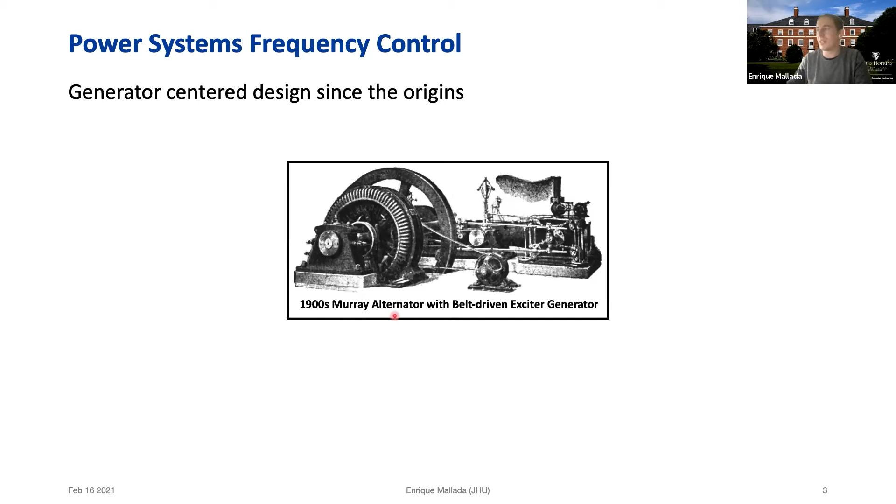And I will argue that this is a problem that dated from the beginnings of power systems. In fact, the whole control architecture around this frequency was built around synchronous generators, like this one I'm showing in this picture that is quite old, from the 1900s. And a key part of this control architecture is something that we call Droop control, which is in charge of many things. Essentially, it's in charge of making sure that supply and demand is balanced. It makes sure that all generators basically are synchronized with the same frequency, and also it's in charge of actually distributing changes in the demand across different generators - that's what we call power sharing.

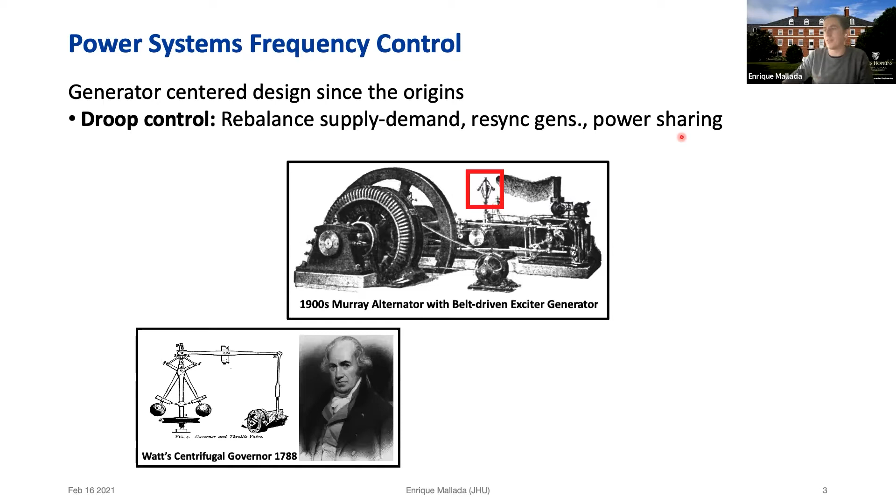But I would argue that this is perhaps something that was not initially invented for power systems. In fact, every engine that you can think of, even steam turbines before that, actually had a very similar mechanism of control. And the mechanism is fairly simple.

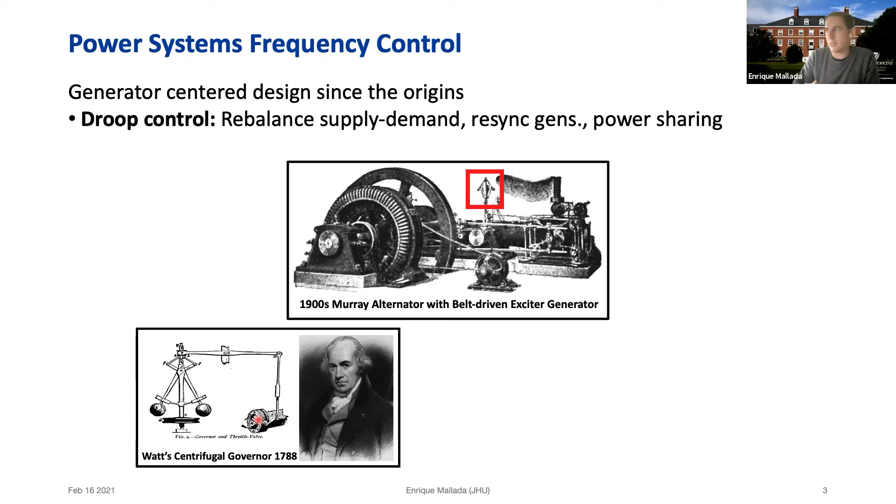So this is a rotating vase, and the balls, as you start to speed up, they go up. So this lever basically goes down, this guy goes down, this guy goes up, and then you close the valve. So in a sense, whenever you see that your generator is starting to speed up, it's because it's basically emitting more energy than the one that is demanded. Then you close the valve and you slow down.

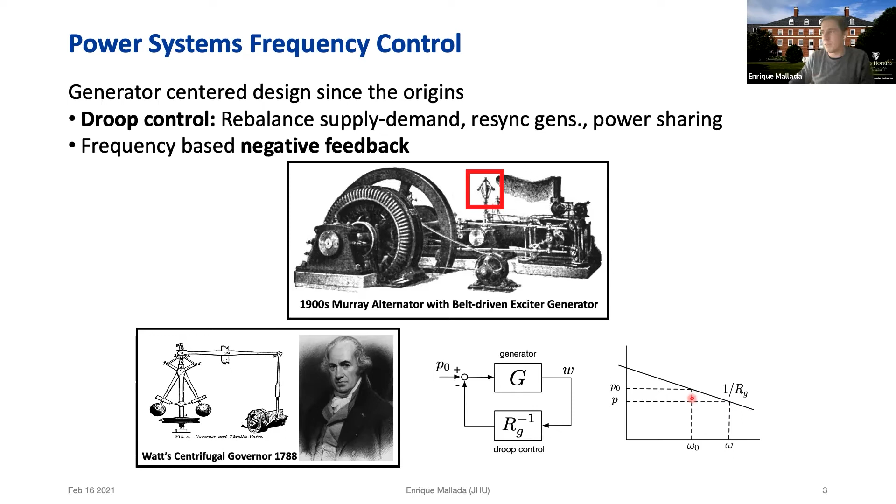And for the control audience, this is nothing more than a standard negative feedback. You have a generator, you measure the speed, and then you make changes proportional to the change of the speed. And therefore, that's why you have the negative slope, meaning speeding up implies reduction of power. Okay, so far so good, and it's very simple. And if you are not fully convinced about the mechanism, I'd like to provide you with a mechanical analog.

Think of a generator as one of these trucks, and the goal is you're going uphill, and you have to push a certain load. There is some friction, some demand, some payload that you need to carry, and then you go with a certain speed, you have your mass, and you're exerting a certain amount of force that pushes you uphill.

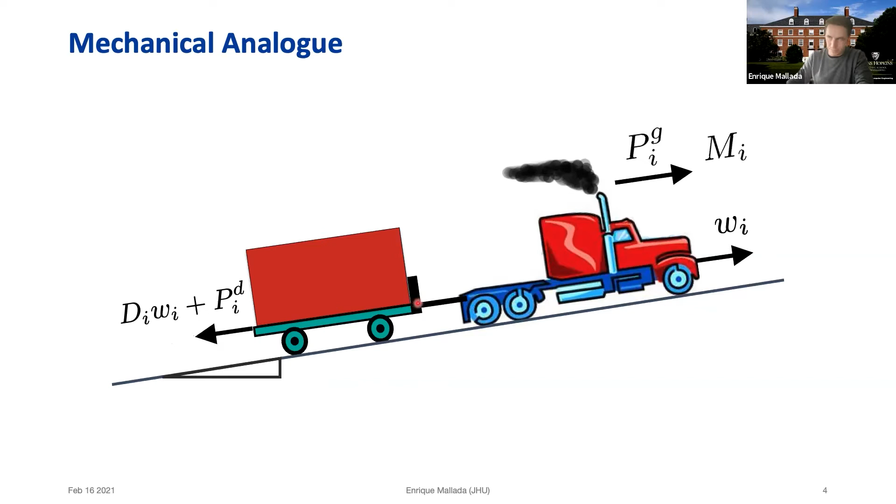What happens in power systems is that this load changes over time, so the drag changes over time. You want to, despite all this, maintain the speed constant or closely regulated around a nominal 60 Hertz, or 50 Hertz if you're in Europe. Although this is not true for trucks, the closely regulated part is more critical in power systems, because if you go too far away from this, you start to excite certain resonating modes in these machines, which is something you don't want to do.

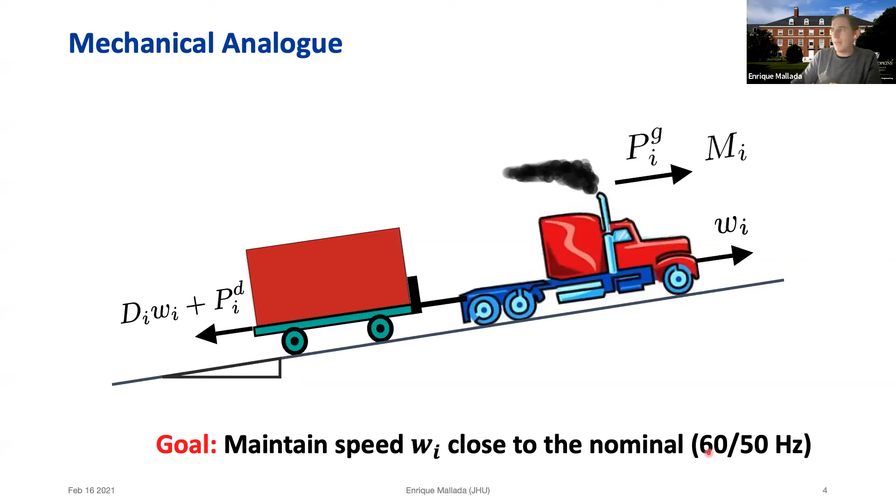It looks not so complicated, except that what you really have is a full network of a lot of these generators all interconnected with each other and dragging loads that are distributed geographically around the whole, for instance the Eastern Interconnection, so the east of the US, or the West. So it looks like this. The way you really solve this problem of making sure all these trucks are running at the same speed is by a hierarchical structure.

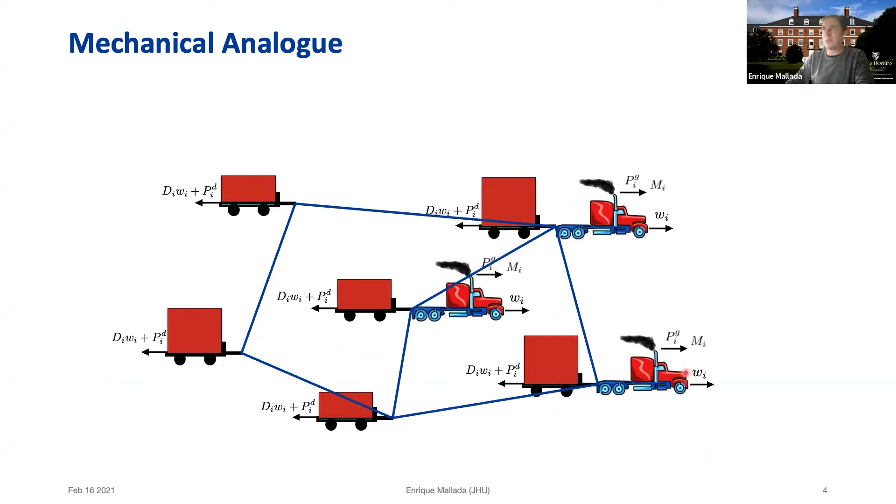There's a first stage that is called primary frequency control, that is this droop control, this proportional feedback. Then you have an additional layer of more sophisticated control that ensures other things, like making sure the nominal frequency stays around 60 Hertz, and also that the power going through tie lines of certain interconnections with other areas is maintained. So this is like a snapshot of what frequency control in power systems looks like.

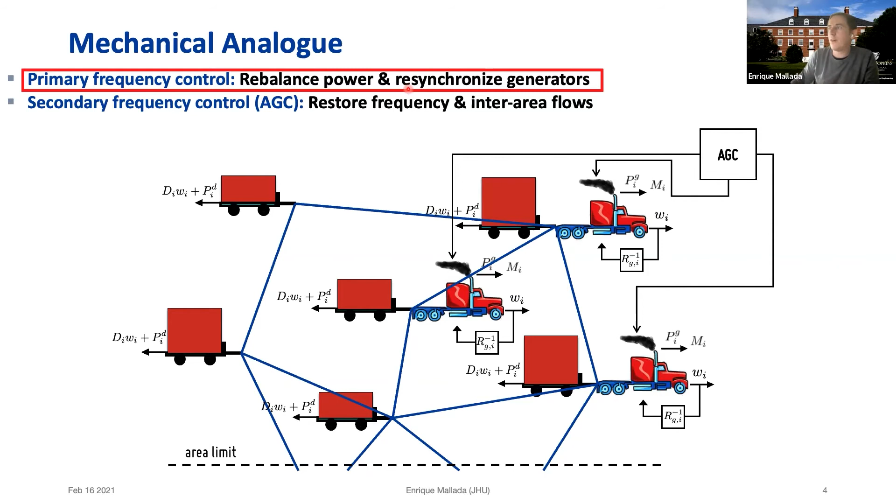From now on I really want to talk about the first part, actually rebalancing power and resynchronizing generators, because as I mentioned before, this is a talk about low inertia and the fact that there exists some dynamic degradation happening in the system that is caused, indirectly, by the integration of renewables. And this is not a hype, it really happens.

If you look at the Nordic system in Europe, you see frequency fluctuations deviating more and more from 50 Hertz. Ireland has a limit on how much renewable generation they allow as a fraction of the total load. It used to be 50%, I believe nowadays it's more around 75%. But the point is, after a certain threshold, there are concerns that the system might not recover from certain events, so they have to actually curtail renewable generation.

Even in the US, while the problem is not so drastic today, there's already some evidence of this dynamic degradation, so frequency fluctuations are becoming larger and larger. I mentioned that this is related to inertia, and to drive this further, I'm going to show an analogy that shows why this happens, why these behaviors indeed occur.

So let me give you an illustration of what I'm talking about. This is a very simple pendulum, heavy, a big pendulum. So for me, this is big. What I'm going to do is kick it, and see what is the response of this system for this particular pendulum.

I'm going to show you the angle, the velocity, and the forces, including the friction and the disturbance that I apply. So there goes the disturbance. And then you can see that you have friction going on here, so there's an energy dissipation. And you also see these angle fluctuations and velocity fluctuations going.

One thing that is interesting about this particular case is that even though the disturbance actually is prolonged over time, the actual amplitude is not so critical, not so big, since it's a big pendulum. So when you push it, it takes a lot of energy to put it in motion beyond the steady state. So in a sense, the fact that the oscillations are bounded, not so large, tells you that it provides this natural disturbance rejection when you have a high inertia pendulum. But also it's hard to regain steady state, so it takes oscillations and settles longer and longer.

Okay, let's now try to see a low inertia pendulum. This is how a low inertia pendulum looks like, and I'm going to do the same force. And now you start to see two differences. The first one is very large oscillations, the amplitude of these oscillations are larger. So you can imagine why we're seeing larger oscillations also in the power system when you have less inertia.

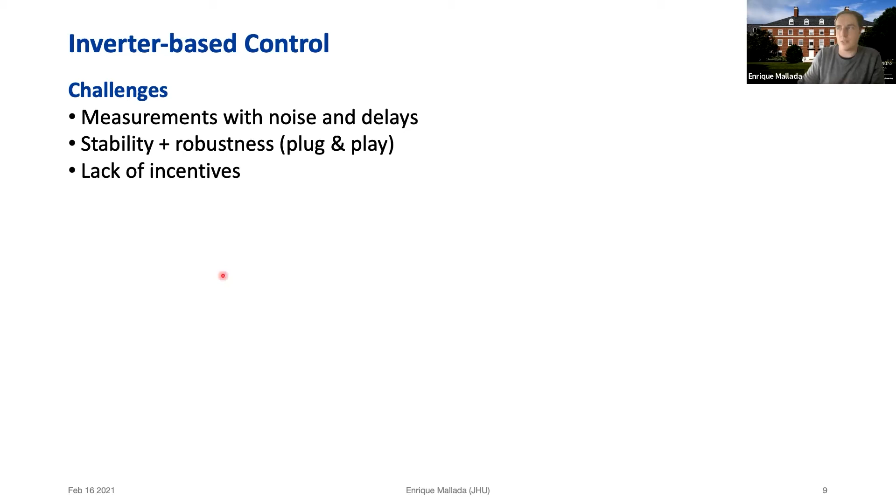So that's it. But how are we proposing to solve this problem? Many people are proposing to solve this problem by saying, okay, from the dynamical point of view, something that's plug and play—one solution would be to basically make these inverters mimic the response of a generator.

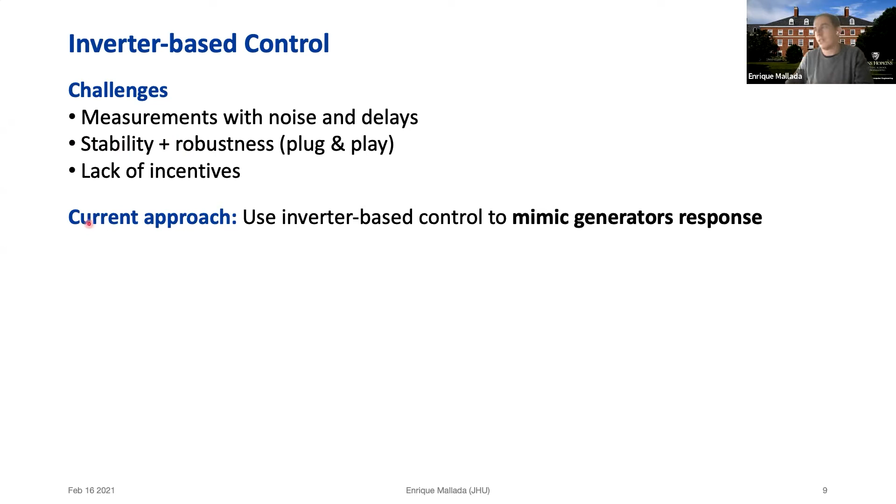So if you want to put it in a picture, it will be something like this. You have very sophisticated power electronics that are extremely fast, and you design a controller that makes it behave like one of these generators.

And you get the argument. So it is one way to do it, but I always have this analogy that to me this is sort of like saying, so I have your favorite smartphone and you make it work like an old phone. It's like, sure, this probably is gonna work, but there are certain trade-offs and certain things of making this type of decision that actually might prevent you from doing something that is much better.

And this is sort of like what we're trying to propose, is trying to say, okay, let's try to think of this as a control design problem and try to design controllers that actually achieve the performance metrics that we care about in the power system.

So what are our design objectives? Basically exploit the capabilities of power electronics, improve dynamic performance, of course. I would say control effort, in the sense of the amount of power that I need to deviate from my nominal production, is important. And then of course the stability and robustness. Because I don't have the whole day to talk about this, while we have been working in all these areas, I mainly I'm gonna talk about improving dynamic performance and this issue with the control effort that is gonna become more clear soon.

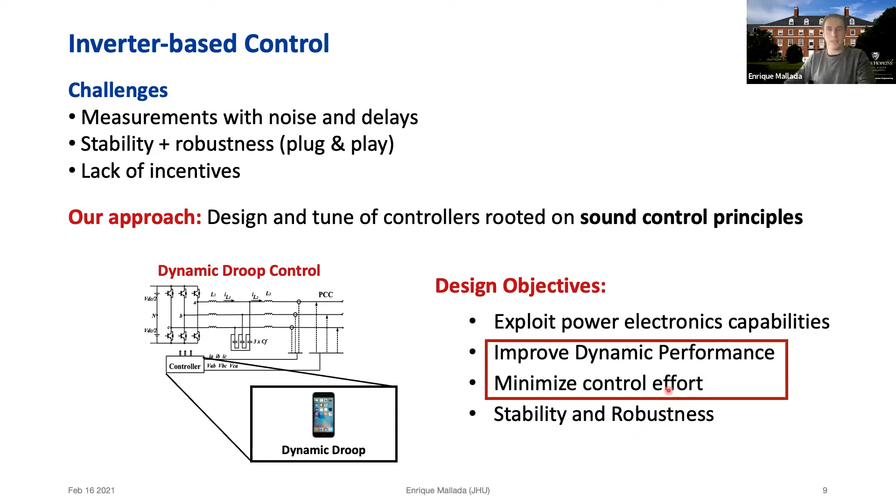So this is basically the summary, the outline of the rest of the talk. I'm gonna first define what are the performance metrics that we're gonna design, what are the things that we think are good ways to capture the behavior of the power grid, and how this relates to existing metrics that are being used today. Then I'm gonna show you that if you do this notion of virtual inertia, which is mimicking generation response or Droop control, there are some limits in performance. And then show you that if you just design controllers that are slightly more sophisticated than just mimicking that response, then you can actually do systematically better than using these approaches.

And this is basically based on 3 main works that I'm going to be talking about today. So the first one mostly defines this performance metrics that I mentioned. The second one is about the core controller that I'm going to talk about, this dynamic Droop control. And then I'm going to talk also a little bit about some new results for a new control that has certain additional advantages that we call frequency shaping control.

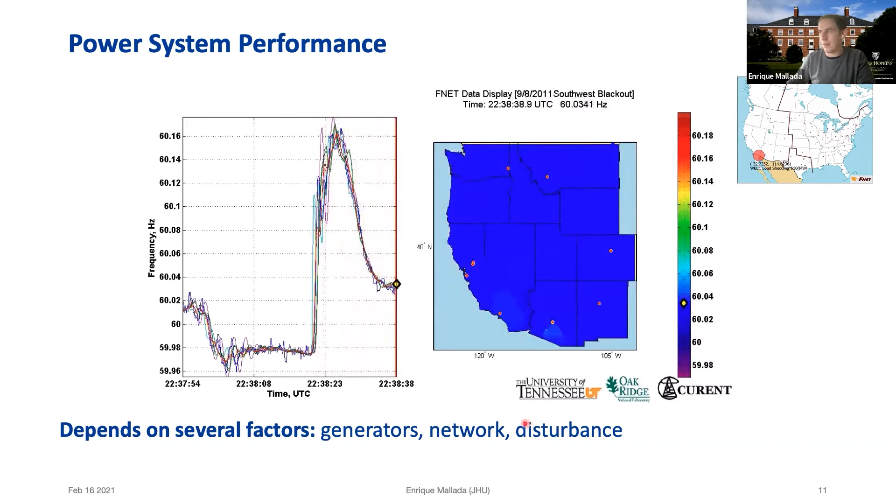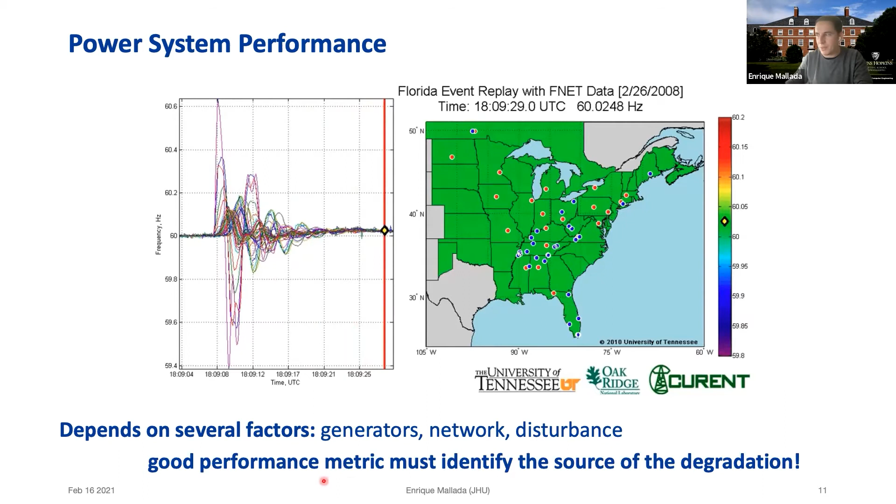So what I would like to propose is a set of metrics that can actually identify what is the source of the dynamic degradation and how this is affected by, say, the network, the generators, or even the disturbance. So the argument I want to make is that good performance metrics must be able to identify the source of degradation.

Let me provide you two slides on how we evaluate performance. I'm going to give you the power engineer version of this, and also a subset of the control system theoretic version of this. Let me be more precise.

So the first one is the response to a step response. You can see this is fairly similar to what we saw with the San Diego blackout, except inverted, because it's really like the loss of a generator that could generate something like this.

So we have the frequency, and there are several metrics that are important here. You usually call this point A, B, and there's also an additional point C that is not shown here... oh sorry, it's here.

In terms of the metrics that are critical here, one is called the rate of change of frequency, basically the maximum rate of change of the frequency. Then we have the nadir, which is the point of the lowest frequency, or arguably the highest frequency achieved. And then we have the new steady state, the new frequency that's achieved after the disturbance. This is still during the first stage of the response, before the secondary frequency control that I mentioned before actually kicks in.

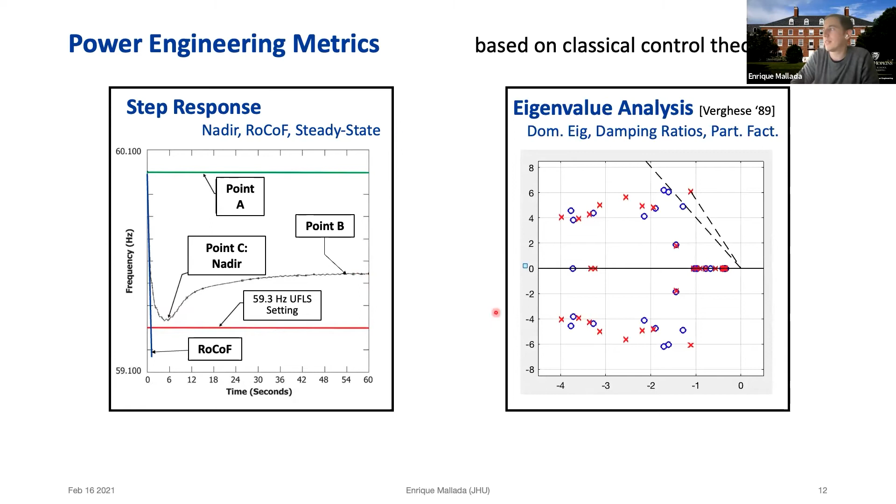A set of complementary measures to this is usually when you look at an eigenvalue analysis around the steady state. Basically you look at the dominant eigenvalues and the damping ratio of those eigenvalues and try to see how these are changed by changing certain configurations of the grid.

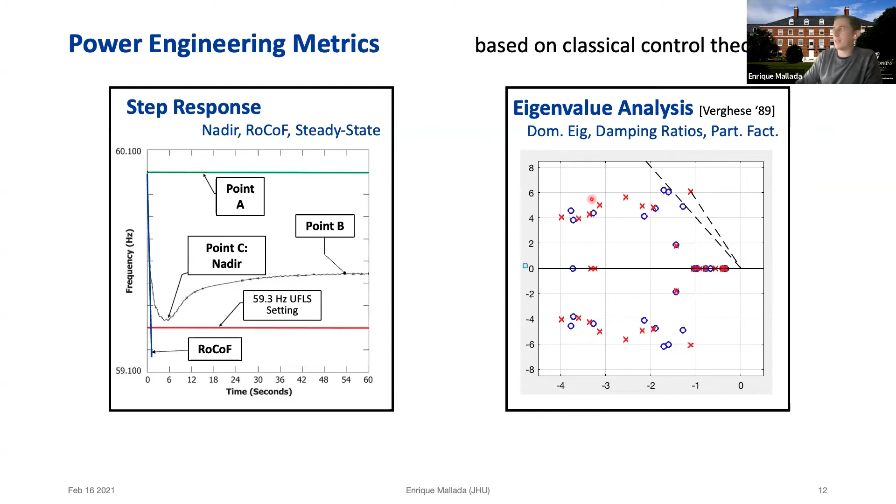I would say that these actually have several positive sides. They're certainly domain specific. This is something we care about because, as mentioned before, too much deviation of the frequency is an issue, and we also have certain protections that disconnect loads — under frequency load shedding, we call it — which will disconnect loads if the frequency goes too low. So we care about this because we don't want to disconnect loads, since those are blackouts, and therefore it's good to have these metrics that measure that.

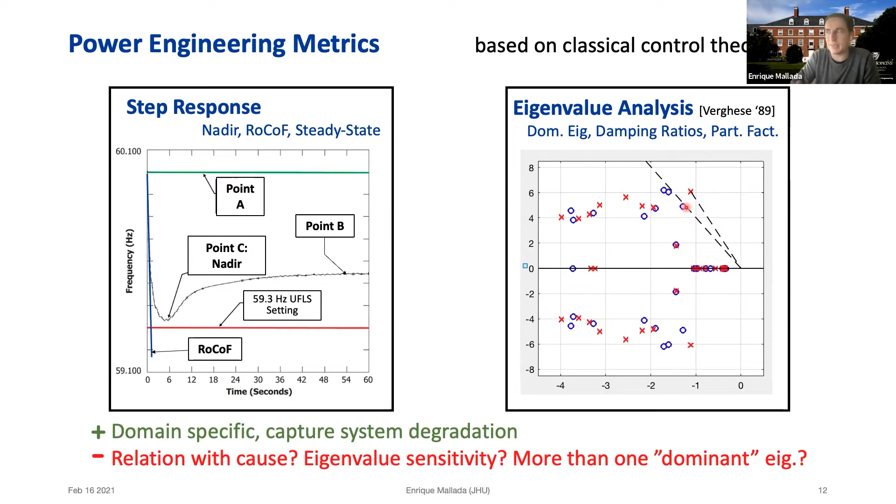But sometimes it's hard to associate this with cause. If we have this particular overshoot, or if we have an eigenvalue that moves from here to here, what is the source of that eigenvalue moving? Why is it that we have additional oscillations? Is it the network or a particular controller? There are methods to do this, but it's all numerical, and it's basically trial and error in some ways.

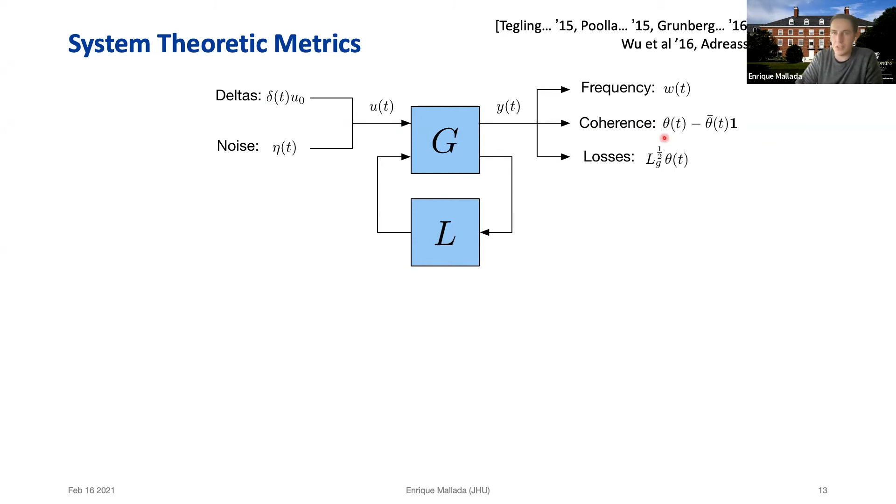On the other side, you have the other world, which is basically the control community designing system theoretic metrics for network systems. There's been a lot of recent work in this area. The basic idea is that you introduce disturbances that can be noise or deltas, and then you look at a certain output that you care about — frequency, losses, some measure of coherence.

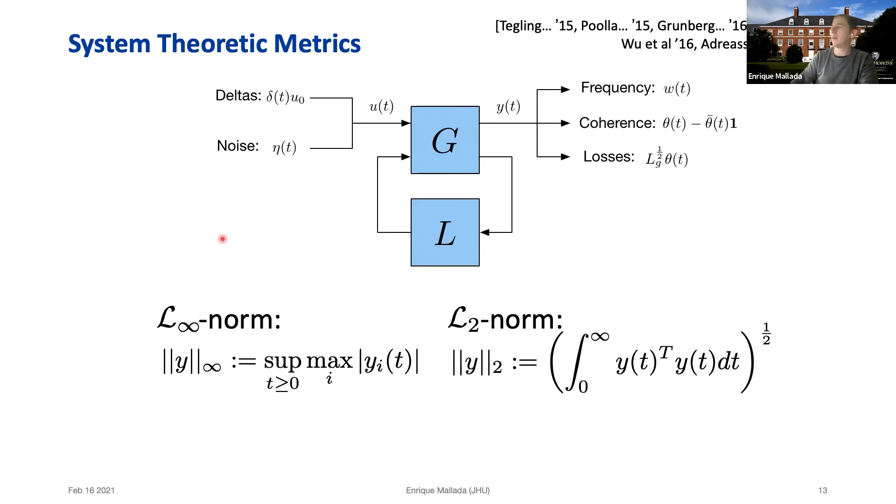And then you basically compute some system metrics that are derived from certain signal norms, like the L infinity norm, or the L2 norms of some sort of integration of the output squared, when you have either deltas or, yeah, basically when you have deltas.

The nice thing about this type of metrics is that usually one gets qualitative analysis that's very useful. You can relate certain properties of the performance of the system to parameters of your nodes, parameters of the network, and you can even do very efficient computational methods to compute several of the things.

But the point is they're not very related to what power engineers look for. There's no concept of nadir introduced in something like this. There's nothing related to RoCoF. These are not step disturbances, just noise and this delta function, which are some abstract notion.

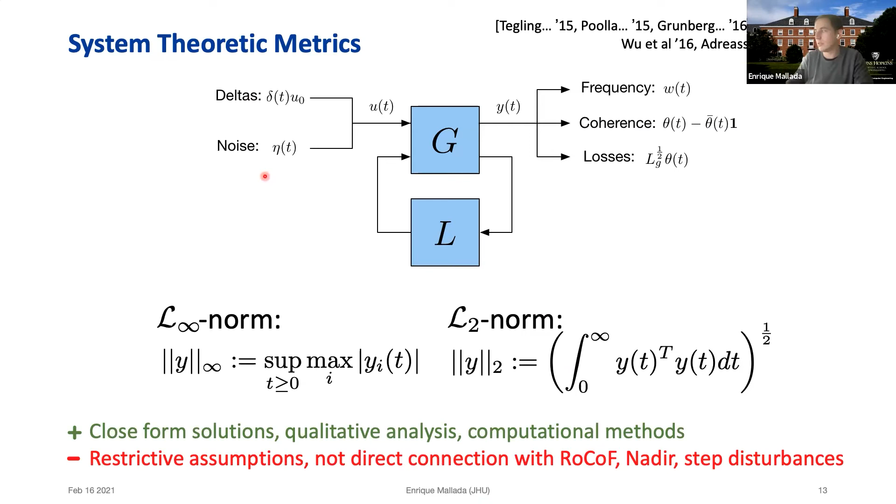Okay, so let me now provide you my proposal, or the type of metrics that we have been using, and hopefully you will see that they sort of meet in the middle of the two worlds. So we have two types of metrics, one depending on the frequency, and these metrics are based on frequency variation.

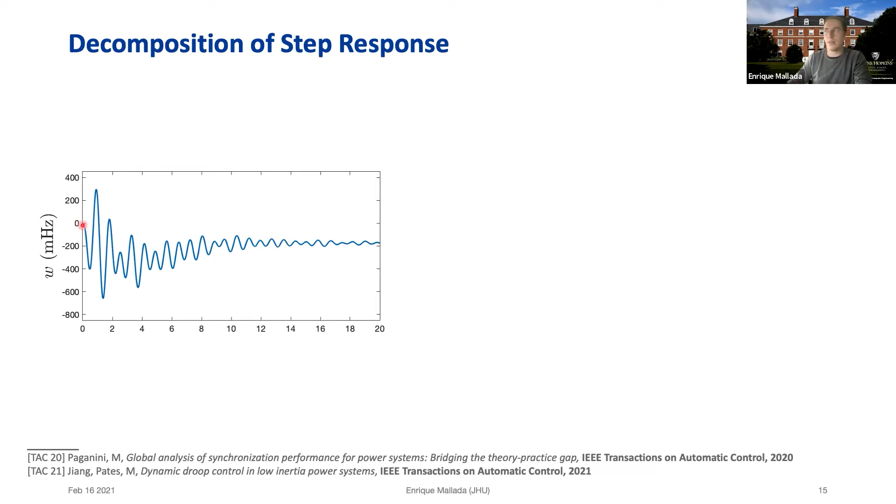So this is the frequency of one bus, and what I'm going to do is decompose it into two parts. The first part is what we call the center of inertia frequency, the system frequency — a weighted average multiplied by the inertia of each one of the generators, and that's what we define as this. By the way, this is related to the center of inertia, something very well known. But we're going to use this.

And then what we're going to do is subtract the system frequency from each individual frequency. This is at this tilde W. And I measure this as some synchronization error — how much a particular bus deviates from the system frequency.

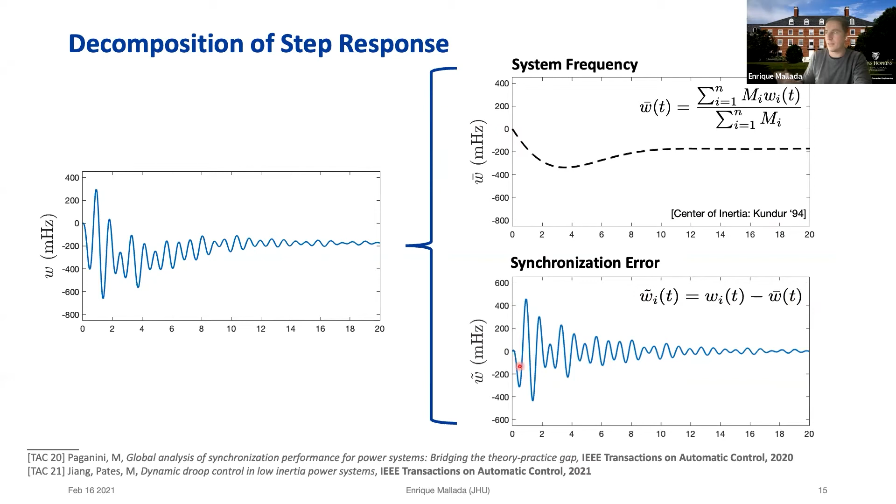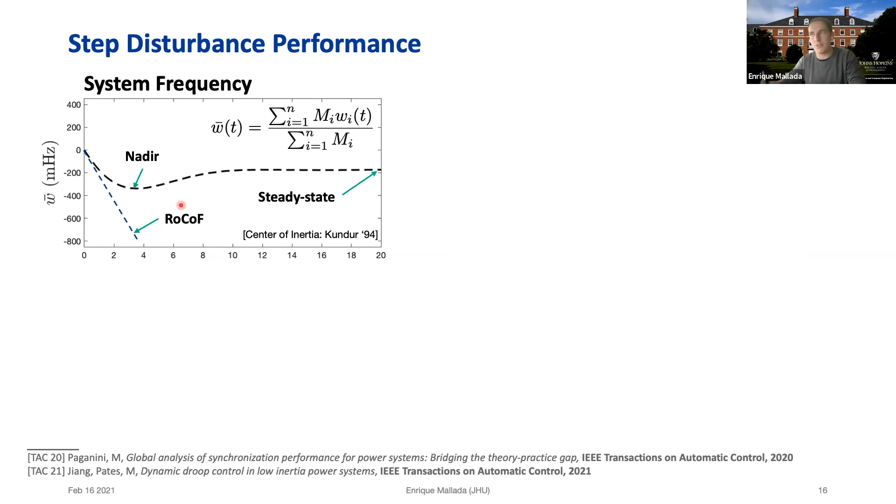Based on the system frequency, we can actually define everything that a power engineer cares about. You can define Rocof, nadir, steady state. And in fact, you can connect this to system theoretic metrics, all based on L-infinity signal norms.

With the error, we can integrate the square of this error and measure the sum over all the errors squared. This gives some notion of synchronization cost. If this area is small, the generators basically synchronize very quickly with respect to the network.

So what about the control effort? I'm going to use the sum of the power coming out of the inverters, and I'll call that X bar. After the disturbance, this will have certain behavior. If this doesn't go back to zero, that means you're giving energy all together.

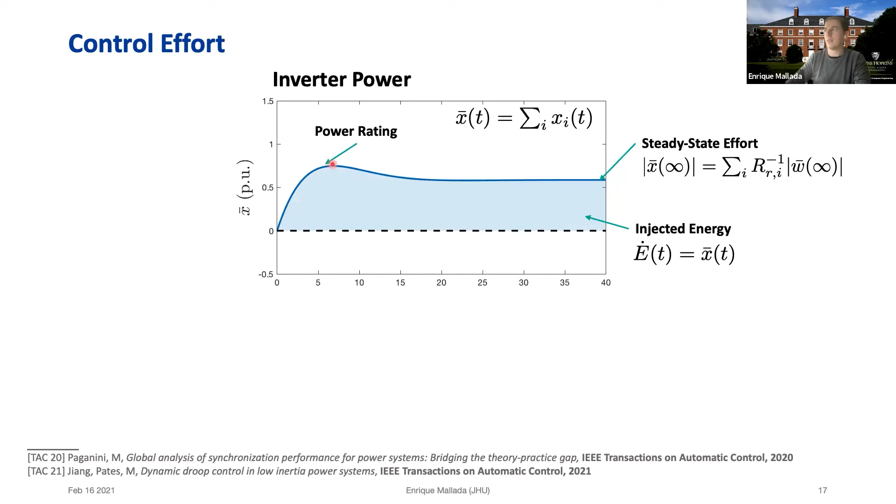So we could measure the energy, and we can also measure the steady state or the peak power. All these are metrics that are important. If you're going to design a control, you want to make sure your inverters can provide that particular amount of peak power. We can again relate it to control theoretic metrics.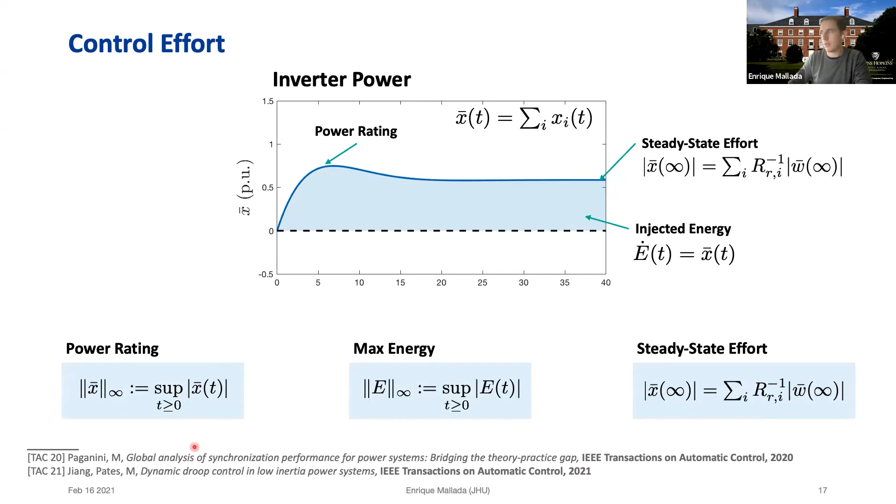If this confuses you, don't worry. I just want to show you that there is a connection, and we use this in the theory, but nothing else. So this is the picture I would like you to have—basically all the metrics we came up with that we think are important when considering inverter-based control to actuate on frequency.

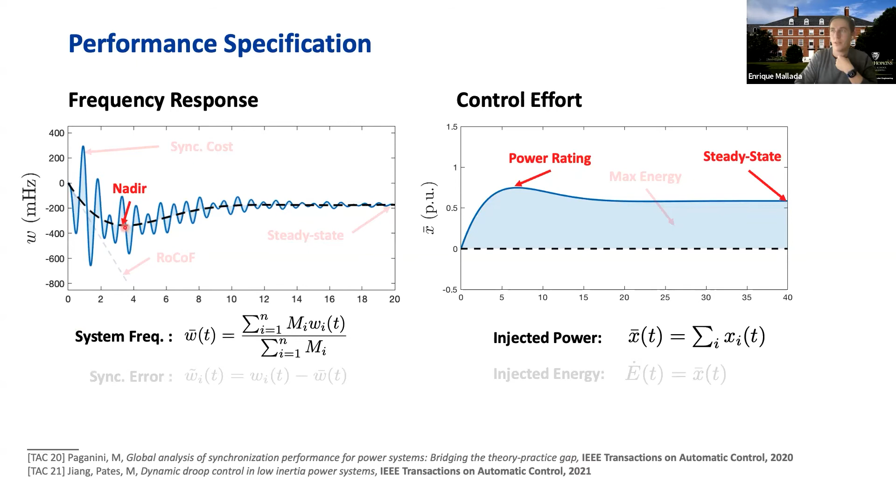For this talk, I'm going to focus on one particular metric, the nadir, as well as the steady state and the peak power. This is the combination I'm going to be talking about. More precisely, as a benchmark when we compare different controllers, what we're going to do is look at...

...the controllability to eliminate the overshoot. That is, if we want to eliminate the overshoot produced in this nadir, how much control do we need based on these different controllers we've discussed?

Okay, I need to go slightly faster. Let me now show you, based on these metrics, how virtual inertia and this droop control implemented by inverters perform. For that, I need a model, and the model is actually very standard.

I'm going to assume I have step disturbances—a vector of step disturbances that goes into each bus. This is a linearized model of the power network. Each one of these blocks represents a bus that has generators, or one generator in a simplified version. And these are the frequencies that get to the network.

This integration tells you that the power fluctuations in the network depend on the phase, not on the frequency. And this Laplacian matrix is a linearization of the power flow equations on the grid. So nothing fancy here—it's a very well-known model, very well studied and used.

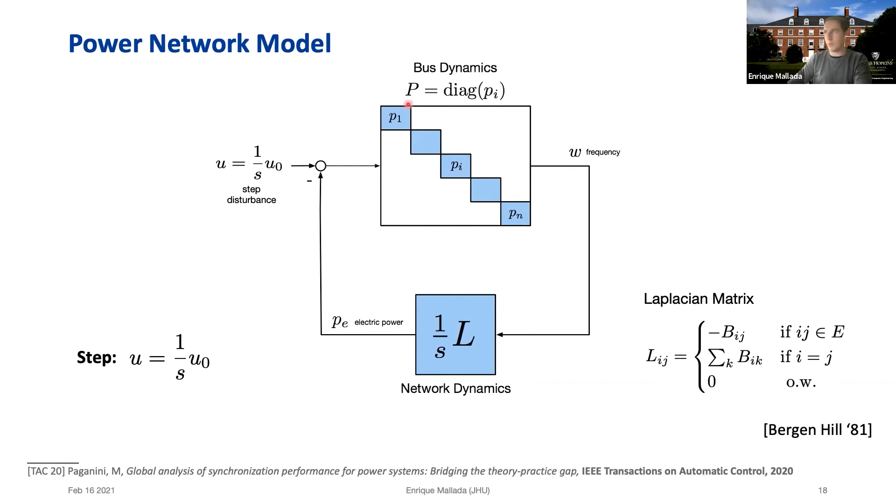So what about each one of these bus dynamics? I'm going to have a generator here that gives you the frequency, and then I'll be talking about grid-following inverters, giving a very simple model for this inverter. But let me first discuss the generators.

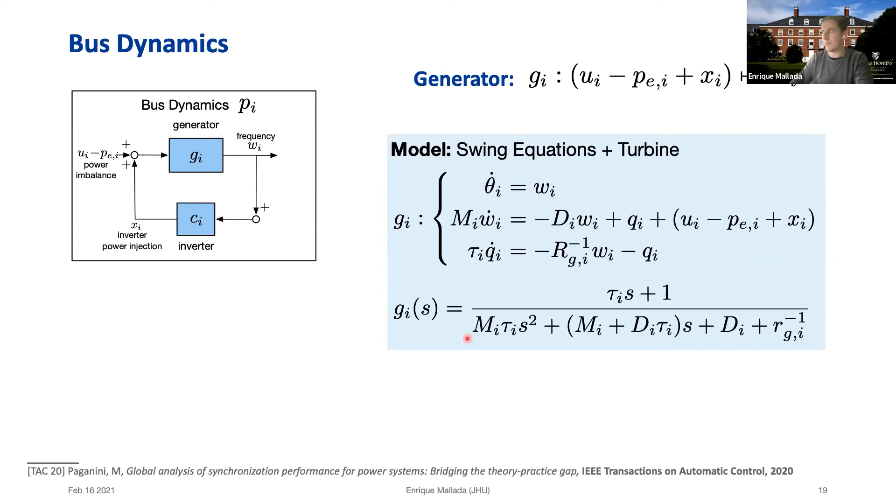In the theory I'm providing, I'm mostly using just the swing equations, which look very similar to the pendulum I showed you before—it's just linearized. This is some measure of power imbalances, this is the output of a turbine of a generator, and this is the turbine dynamics. You can write the Laplace transform of this and look at it as a transfer function. For the inverters, I'm going to look at different simple versions that are maps from frequency to power.

This is basically a simplification, mostly for the purpose of looking at the effect of changes in the power injection at the system level. Of course, if somebody like Brian were here, he'd tell you this is oversimplified. But this is really looking at dynamics on the order of hundreds of milliseconds to seconds, mostly seconds. So this is the time scale for which this makes sense.

You can have a proportional term along all the temporal frequencies of the signal, and that's the standard Droop control. When you add a derivative term, that's what we call virtual inertia, because you amplify the higher frequencies of this transfer function. It's called virtual inertia because when you look at the state space version of this, it's essentially adding to the inertia parameter.

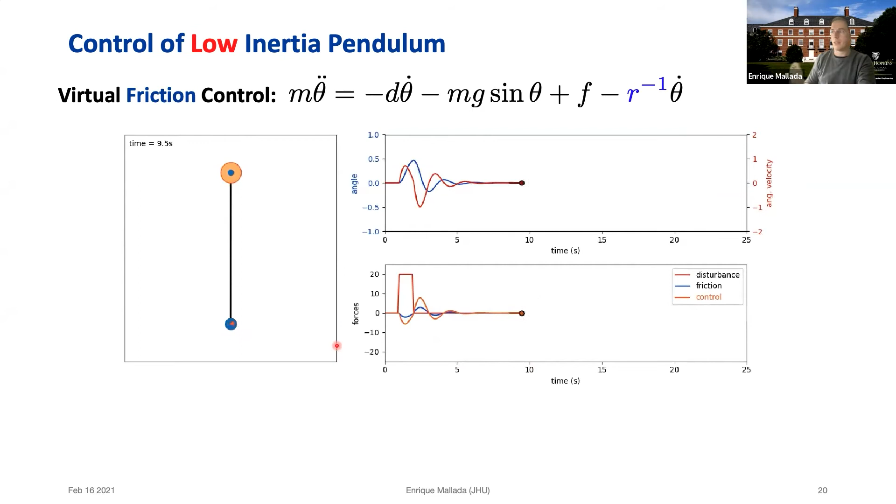What about friction? If you look at friction, it turns out it looks much better, in the sense that it just dissipates the energy that was in the system and settles down much faster. So it provides all the benefits: disturbance rejection, restoring steady state, and also a reasonable control effort - not so much compared to the other one.

But is there any issue with this? I would say that for the pendulum, no, but for a power system, there is - we'll get to that. So let's see how those strategies look when we actually implement them in a power system. Again, we're going to look at the system frequency nadir, and also the power being produced by the inverters. I'm going to try to see: can we kill the nadir?

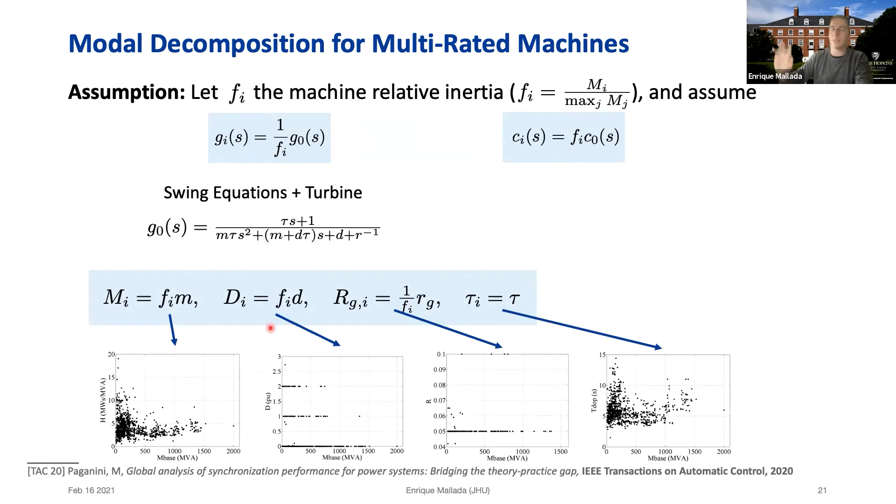There's a little bit of theory related to this, and for that we need an assumption on the transfer function of the generators and the controllers. Basically, we're saying all these functions need to be proportional - equal up to a proportionality factor that depends on the relative inertia of each of the buses. I don't want to get into whether this is good or bad - the answer is probably that this is a really bad assumption. But I'm going to show you that some of the things we're doing still work in the experiments, and there's also another more sophisticated theory, which I can't talk about here, that allows you to generalize these ideas.

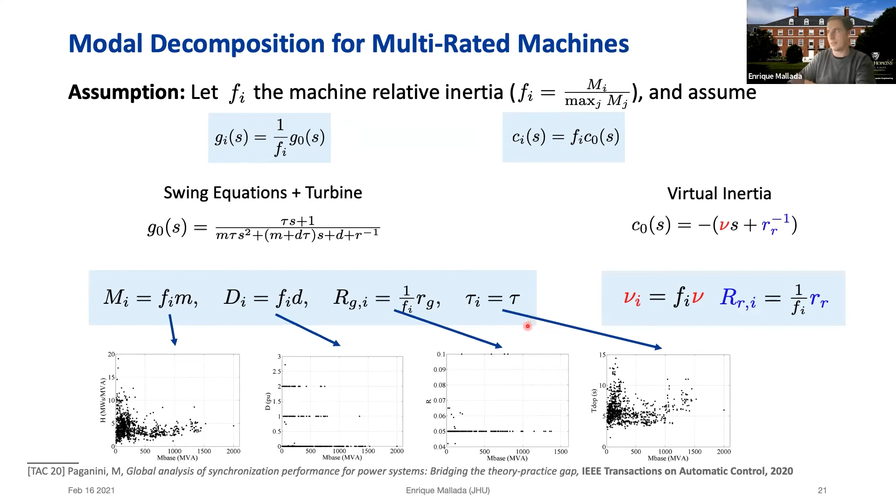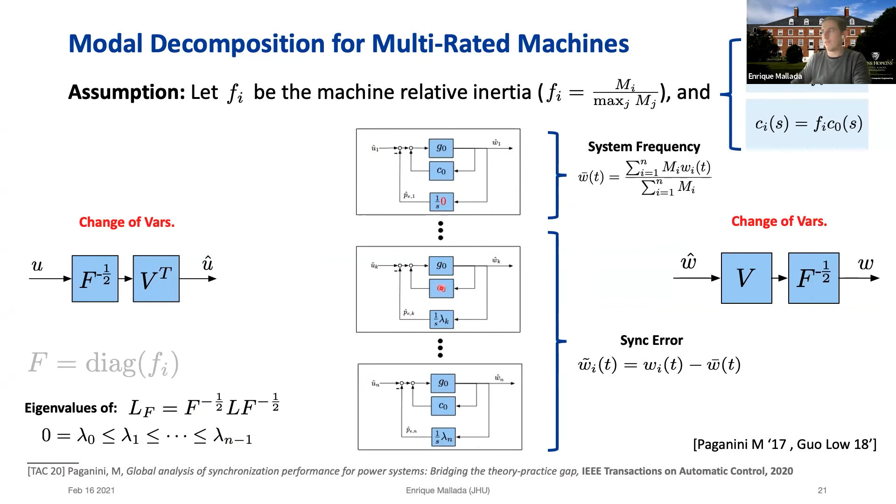So why do I make this assumption? Because after a change of variable in these transfer functions, you end up with a decoupled system - meaning that when you see a disturbance, it transforms into disturbances that affect very simple systems, all equal except for a feedback term that depends on the eigenvalues of a weighted version of the Laplacian. The interesting thing is that the synchronization error is only related to the modes that depend on the network, while the system frequency only depends on the one that does not depend on network properties. So in a way, this is a metric that depends only on generators and inverters, and the effect of the network is seen by the synchronization error.

Okay, so what can the theory tell us about the problem at hand? Let me just say a few things. The first one is that we can explicitly compute this step response for the system frequency in this particular case.

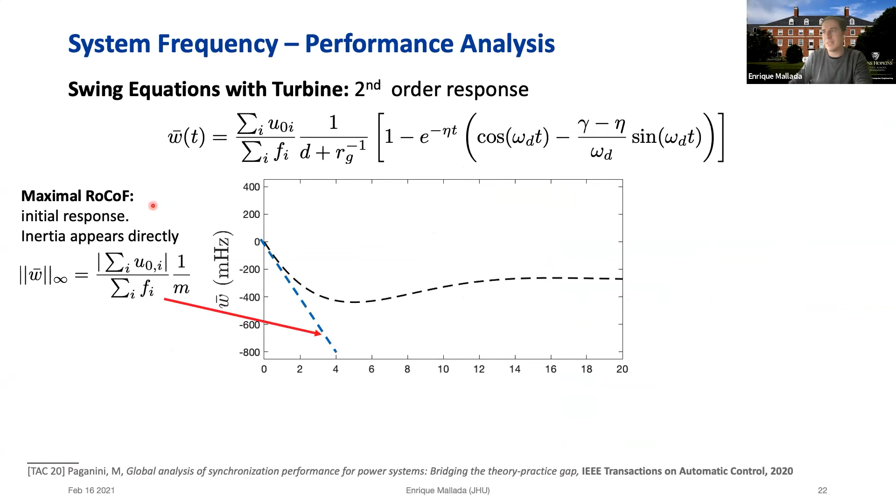And we can see that the role of inertia, except for the RoCoF, the steady state doesn't depend on inertia, but also the effect on the nadir, this overshoot, the effect of inertia in this overshoot is actually secondary. It's much more related to damping and other things.

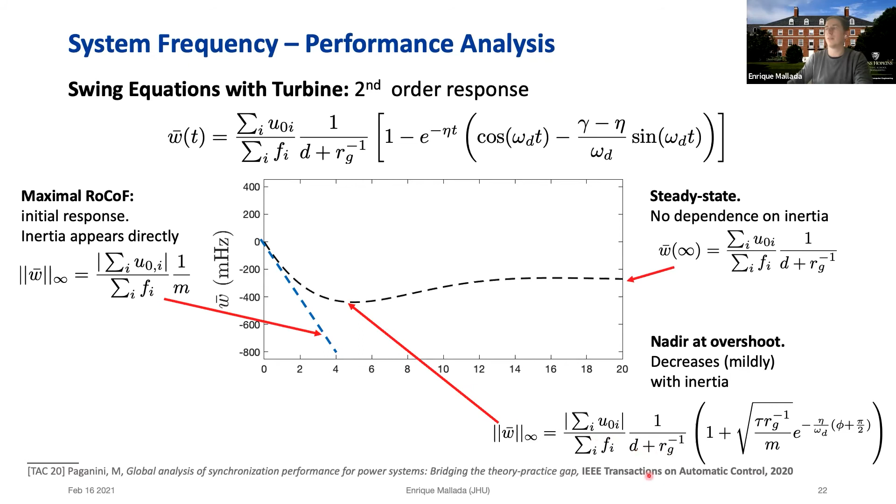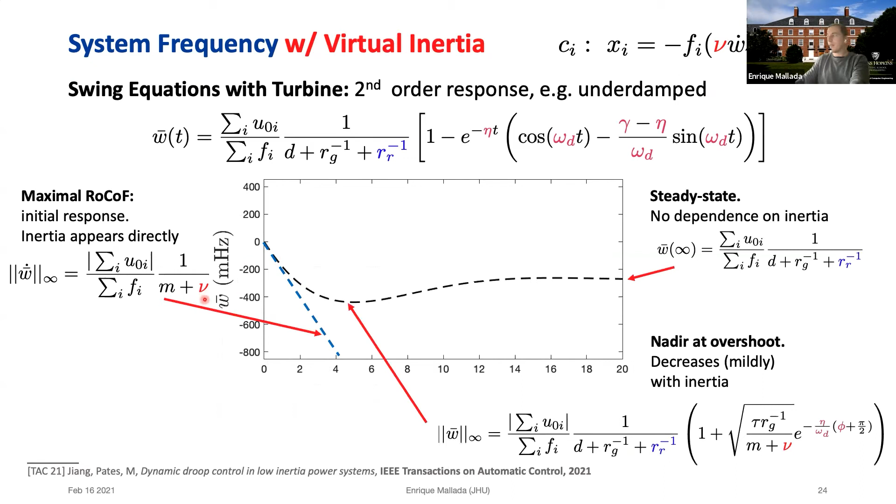What happens when you introduce virtual inertia to the system? The analysis looks very similar, except that now the inertia appears here in the RoCoF. So it is good, arguably. But the other things still don't change.

And in particular, we get to this result that essentially says that if you're using a control like this and you want to eliminate the nadir, this overshoot, then you need this condition to hold. This sort of tells you if inertia is large, then this term could be negative, and therefore you don't need virtual inertia to actually eliminate the nadir. But if inertia is small, then this requires a lower bound on the amount of inertia needed to obtain that. Let me illustrate this with a simple example.

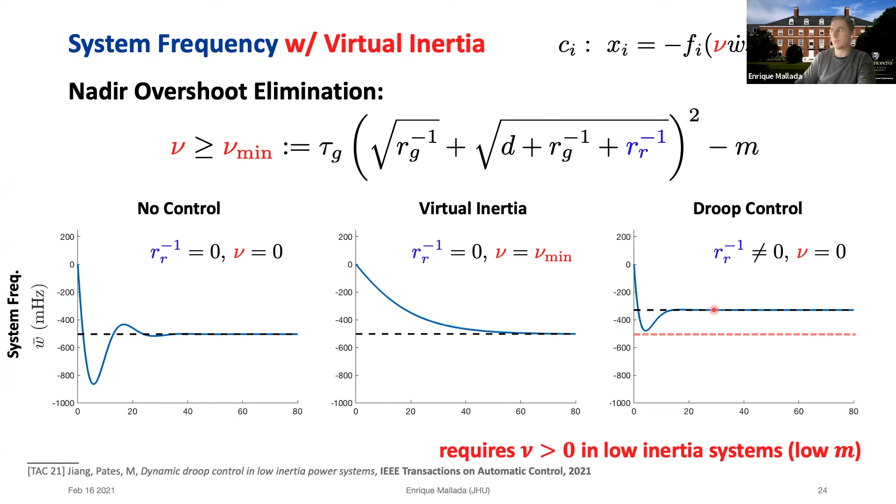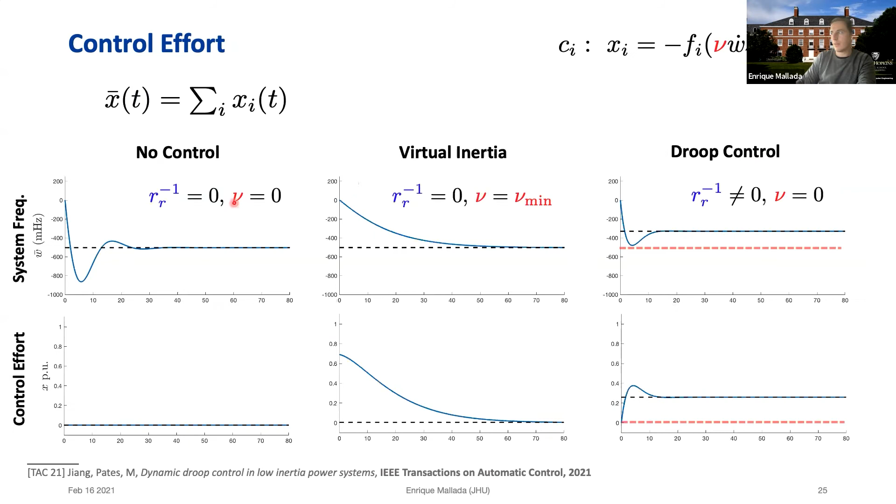What about the power? Well, with no control, there's no power. For virtual inertia, we basically get to almost 0.7 per unit of the disturbance size. And for droop control, we don't get so high, but then we have to provide a lot of power in steady state to keep the frequency here. So in a sense, when you look at only this virtual inertia control, the argument is that, well, it is good for this one, for the pendulum. There's still some issues related to the steady state that you need to maintain, so there's this amount of power that needs to still be sustained.

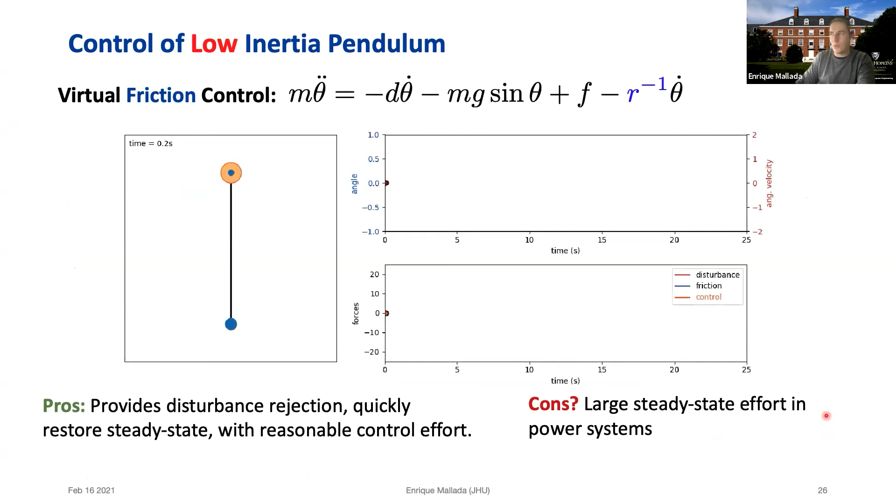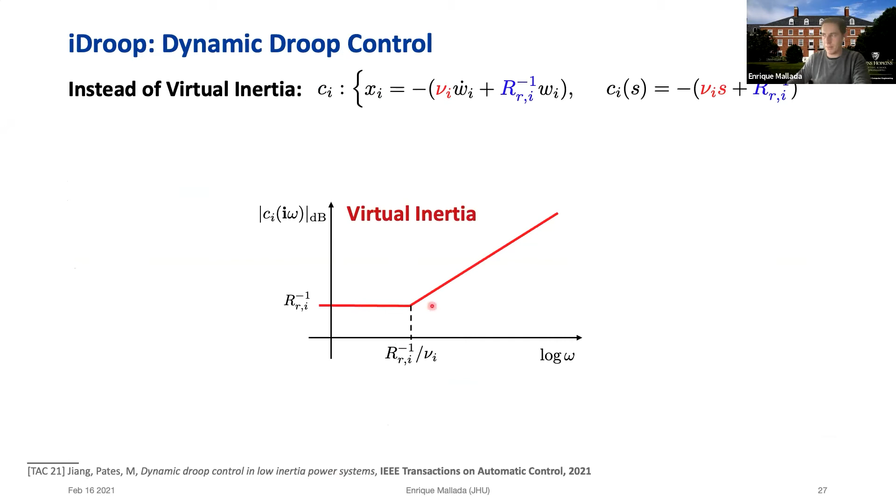Can we do better? Let me now show you one way to do better. This is what we call dynamic droop, or iDroop, the first one. The idea is very simple: instead of having just this type of filter, let's have a slightly more sophisticated filter that comes from putting a pole that can behave as a lead or as a lag compensator. Fairly simple - just make sure that you don't amplify too much the higher frequencies.

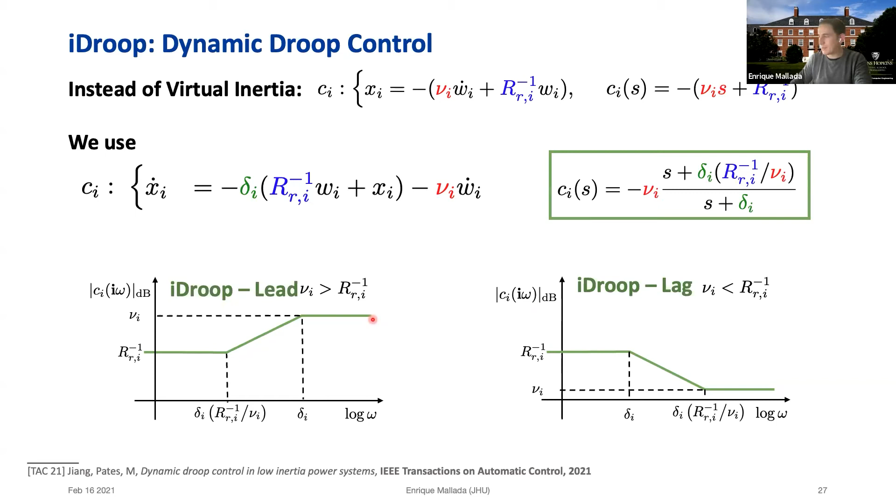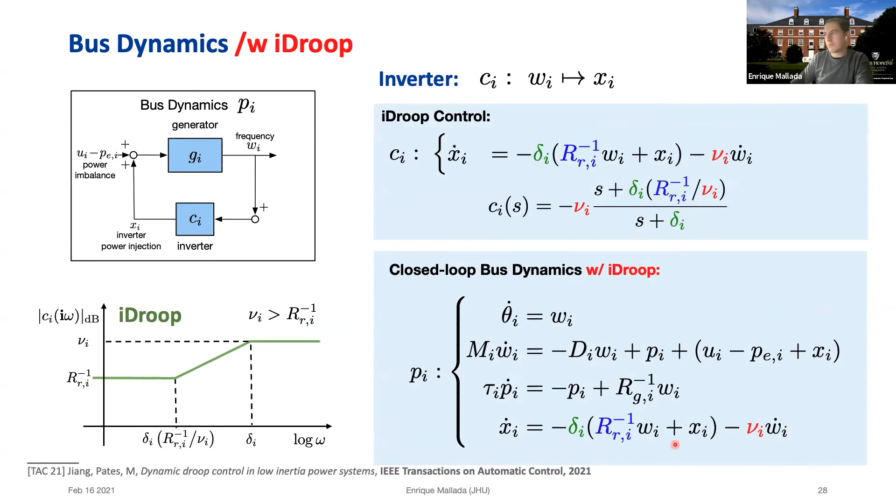What happens when you do this? Well, this is how the actual dynamics look like to start with. So the power that is going to be generated by the inverter is defined by this equation. Not so complicated, but when you test it on the pendulum, this is what happens - you basically are able to eliminate all the additional oscillations that happen in the system.

And the key idea of this is really providing friction only for a certain amount of time and then relaxing it. This relaxation basically reduces the amount of power that you need to give in steady state. So the argument is that if you have a low inertia pendulum, instead of adding mass, all you need to do is design controllers that are good enough to capture and dissipate the energy that you have in this low inertia system.

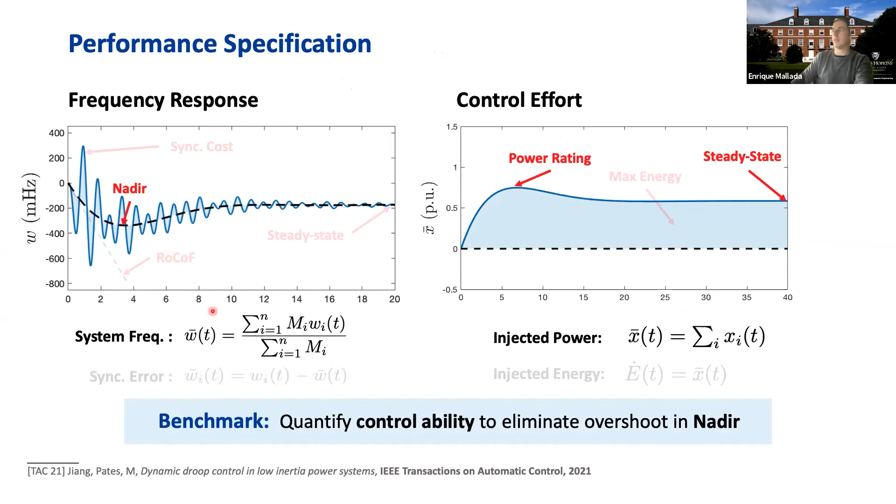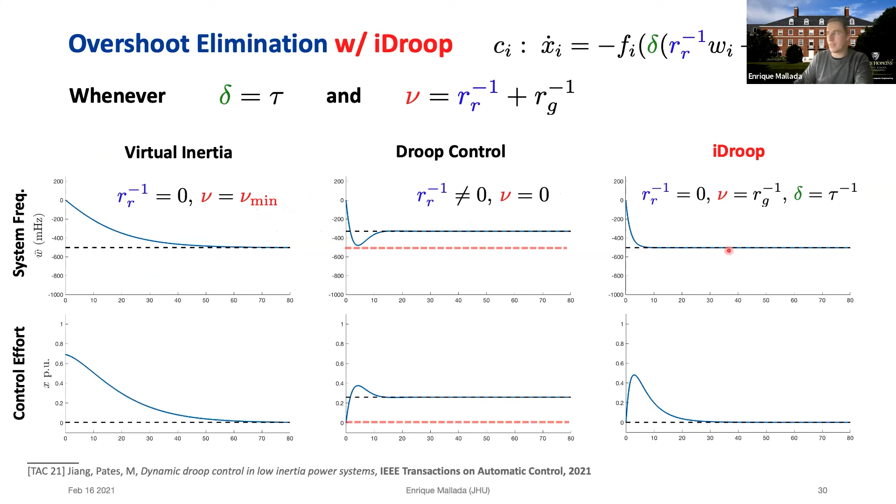What can we say about nadir elimination based on this control? It turns out there's a way to tune the parameters that ensures you eliminate the nadir. If I set the parameters to these values, I make sure I not only kill the nadir, but also ensure that in steady state my inverters are not producing any power. I only need to arrest the frequency to get to the steady state provided by the generators, and that's it. There's a simple explanation of why this controller works with these particular parameter values, related to the turbine time constant and turbine droop.

When you look at the same analysis I was showing before, this has a first order step response. An even more intuitive explanation is that this controller, under those parameter values, sort of looks like a proportional control that cancels the effect of the turbine. So at the end of the day, this is like a first order system with proportional feedback, which is also a first order system.

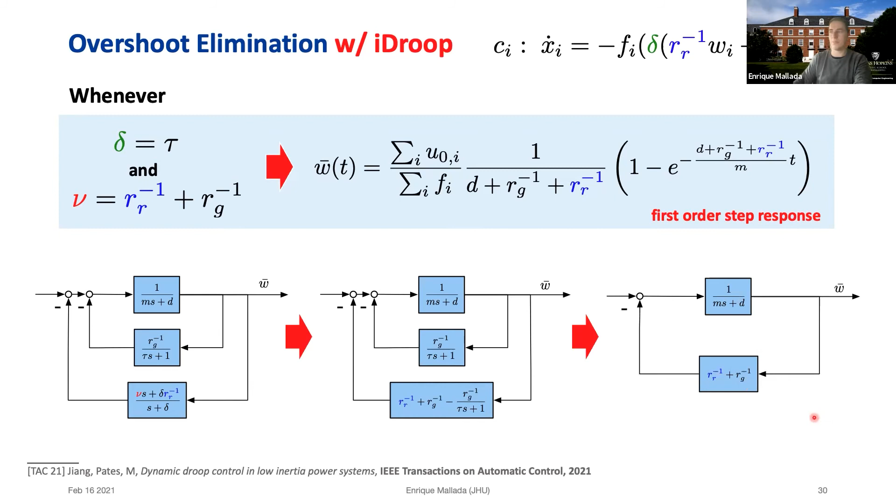Okay, I have perhaps 5 to maybe 10 minutes left, so let me try to provide some illustrations. I'm using the low inertia Icelandic power grid. It's fairly small, maximum load is actually 1.3 gigawatts, and it's also fairly low inertia.

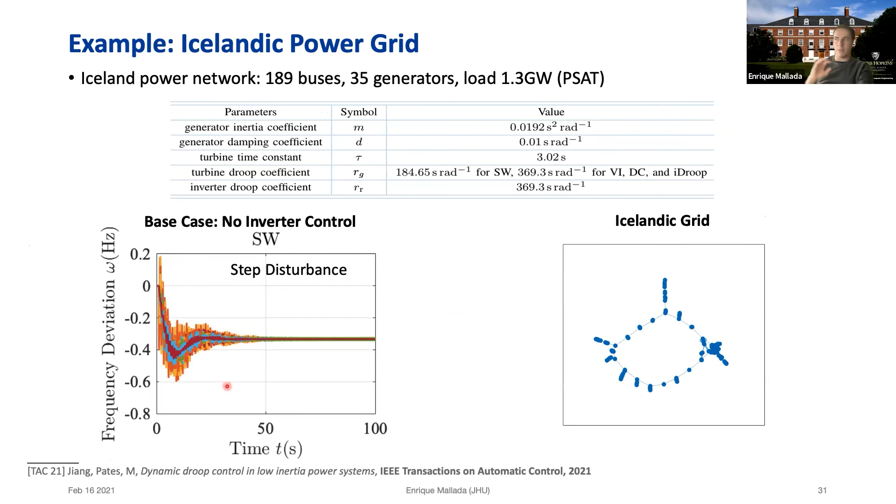What I do in this system is the following: I don't take away generators, but I reduce half of the droop coming from the generators and introduce it with inverters. Then I compare, in the real system without the assumptions I made in my theory, what happens when you try to eliminate the nadir.

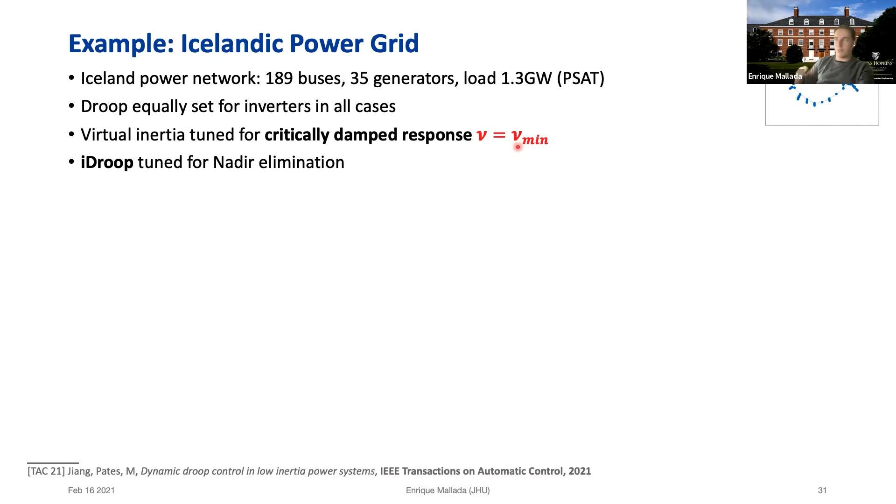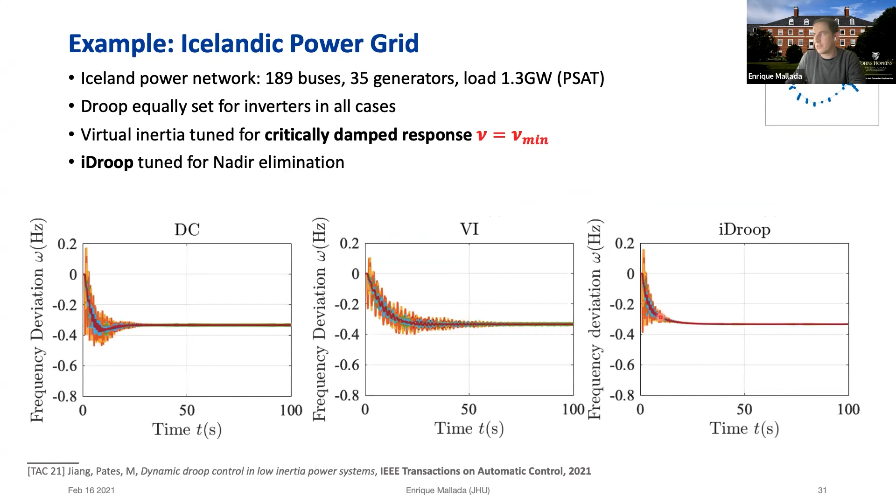On the other hand, iDroop sort of behaves similar to droop control, but it doesn't have to produce a steady state. So it settles oscillations faster and then stays at the same value. In a sense, it leaves the steady state for the remaining generators in the system - the generators are the ones that compensate for the power imbalance. The droop controllers coming from the inverters only affect the transients.

I can talk a bit about parameter uncertainty - the trick I mentioned relies on tuning something very particularly. But when we test it, we see that for this particular critical parameter, there's a vast region of parameters, as long as delta is larger than the turbine time constant, where the same mechanism works. So the nadir actually stays bounded and doesn't overshoot.

I talked about the benefits of using a more sophisticated control - this notion of overshoot elimination. My power engineer collaborators find this very exciting, and it's something you can do at the system level, but also at an individual generator level, provided you have storage close enough to them. There are other benefits too: you can tune for noise attenuation, disturbance rejection, and we can reduce inter-area oscillations if needed with this type of controller.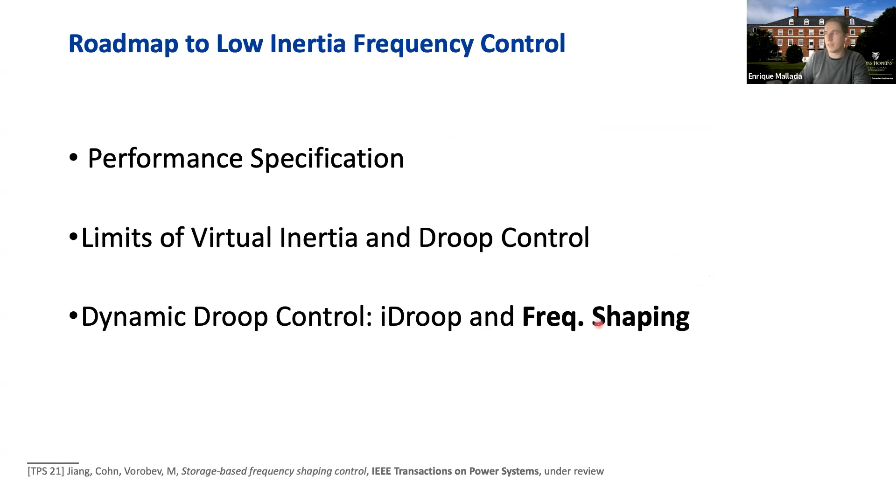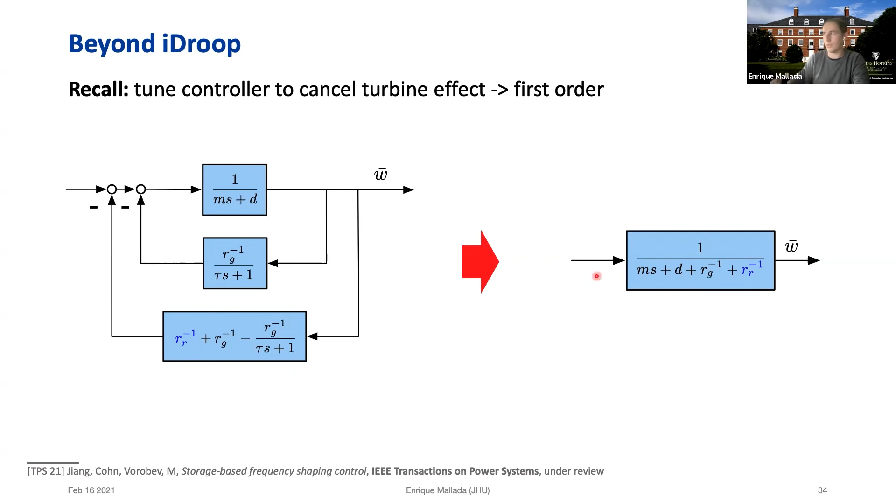However, there's a different way, a slightly more sophisticated controller that actually manages to control the Rocof. The idea is very similar to eliminating the nadir with iDroop, which, if you remember, was basically making this a first order equation for the system frequency. Except that now we want to match this to something that also changes the Rocof, which is basically this parameter. So we want to find a controller that matches this, and the way to do this in general in control is model matching control. So you solve this algebraic set of equations that matches this to this.

The good thing about this particular solution is that it sets the Rocof to be this parameter A, or related to A, and the steady state depends on B. So if you define your controller to be of this form, where this is the turbine time constant as before, then there's an equivalence between the parameters that allows you to make this system behave as a first order system.

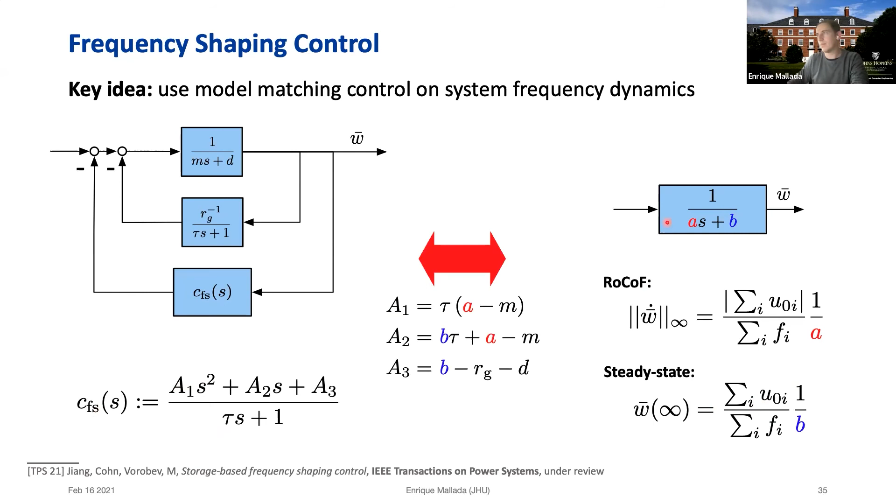Just to show you a simple illustration, this is what we had before: the no control trajectory, the one with critically damped virtual inertia, and this was iDroop. We have this control effort coming from, say, the storage or your inverters connected to renewable energy or whatever. If you do this new frequency shaping control, then you're able to change the Rocof without affecting the nadir.

So there's this trade-off: you have to increase the amount of power, but that's logical. On the other hand, you're able to control the Rocof. So it gives an additional flexibility in the control.

So let me just say that this is a case where virtual inertia was not able to control the nadir, and yet frequency shaping with the same Rocof achieves control of the nadir.

So let me stop there and summarize so that we can have a little bit of time for questions if there's some.

What we developed here was basically a set of dynamic performance metrics that are sort of a midpoint between control and power engineering. It accounts for the ability to identify whether this depends on inertia, damping, or the network. In some sense it's a compromise between the two communities, I like to think it's doing.

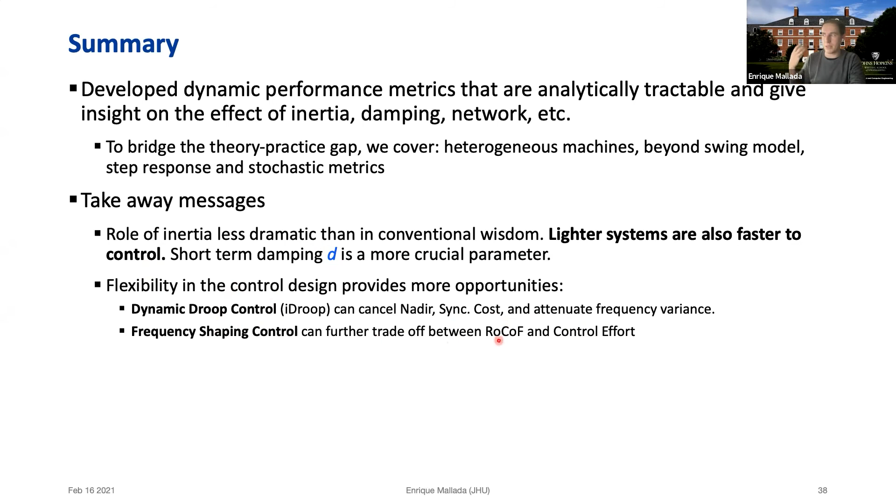But if you are doing control, which is what I did today, then you can do much better than just adding trivial damping or adding inertia. I showed you that with iDroop, we can do nadir elimination. We can also do synchronization cost and also attenuate frequency variance. I mentioned how we can control the Rocof and use the trade-off between Rocof and control effort with this frequency shaping control.

And of course, this is just a narrow picture of a low inertia system and how to shape the power that is injected by the inverters. It's not a full picture. We're missing the fast time scales, which are absolutely important. There's a lot of issues related to how to tune inverters that actually do not induce instabilities with the lines, among many other things.

And of course, the other thing I did not talk much about is robust performance. I talked about how to tune these things, and showed a little bit that if we tune in a particular way, we can do better, and that this seems to be robust. But there are way more things needed to make sure these things actually satisfy performance in a systematic way across many, many cases.

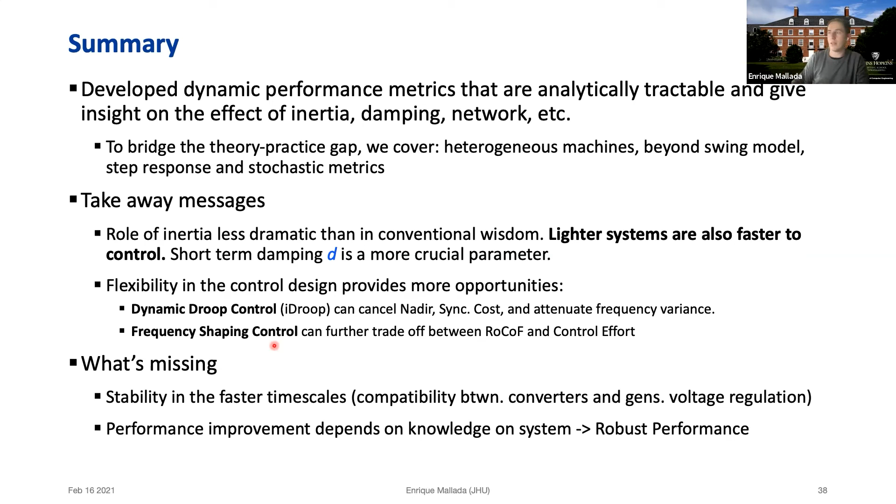So let me stop here and leave it to questions.

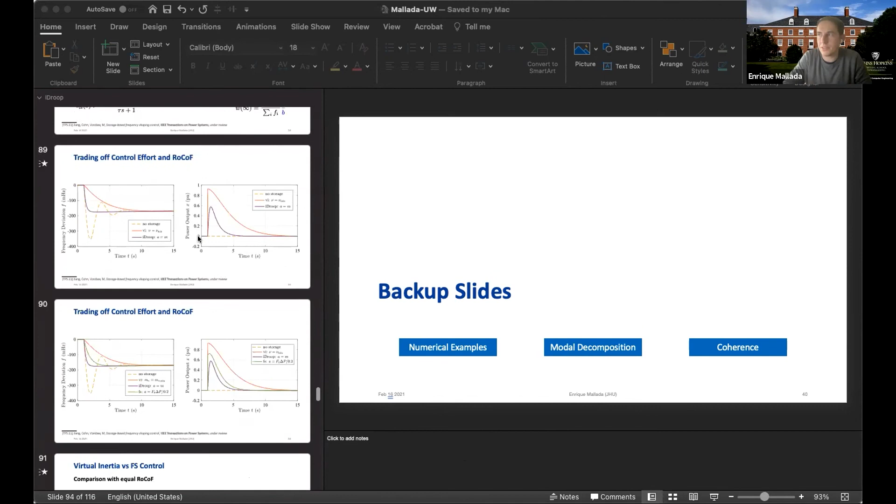Yeah, that's a really good question. The short answer is no. The reason is that when you look at this particular transfer function, this is a proper transfer function, and therefore that means it could be realizable in state space without having to put additional derivatives on the input. So you don't need to derive the measurements to do this.

It's just like a proportional from the input to the output plus some additional state-based dynamics. And you can do this - this is standard in control, provided that this is actually a proper transfer function, so the degree of the numerator is equal to the denominator.

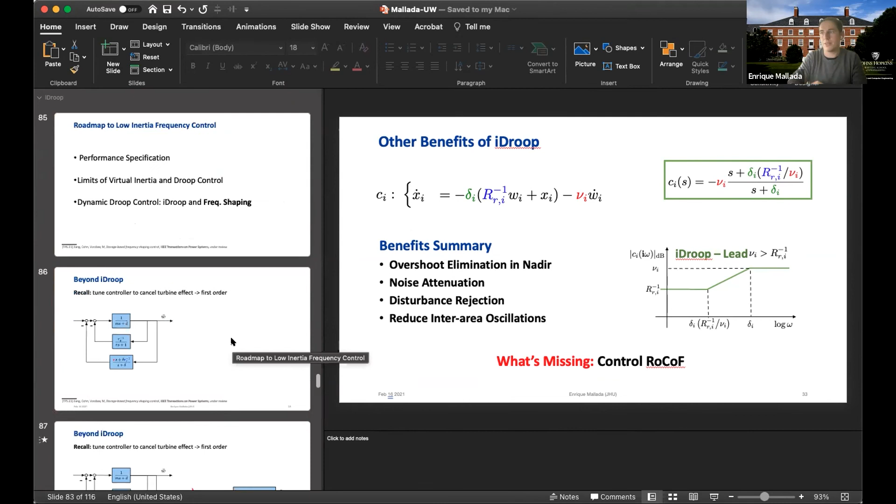However, it is true that when I was showing you the second controller, I did not have a proper transfer function. Again, the standard control trick to do something like this is you add an additional filter of higher frequency than the frequencies that are relevant for your dynamics. And because of that, although the theory cannot tell you that your output is going to be controlled by this, in practice, because of the region of the dynamics, this works.

So the output practically becomes equal to this. So the answer is, no, there's no practical impact when you do that. And you can also change your parameters to mitigate the amplification of higher frequency noise. Yeah, and we have done that. That's a really good point - I didn't mention it in the talk.

Okay, any other questions? Yeah, I guess I have a question related to the controller - do you consider some bounds on the controller, such as the upper and lower limits?

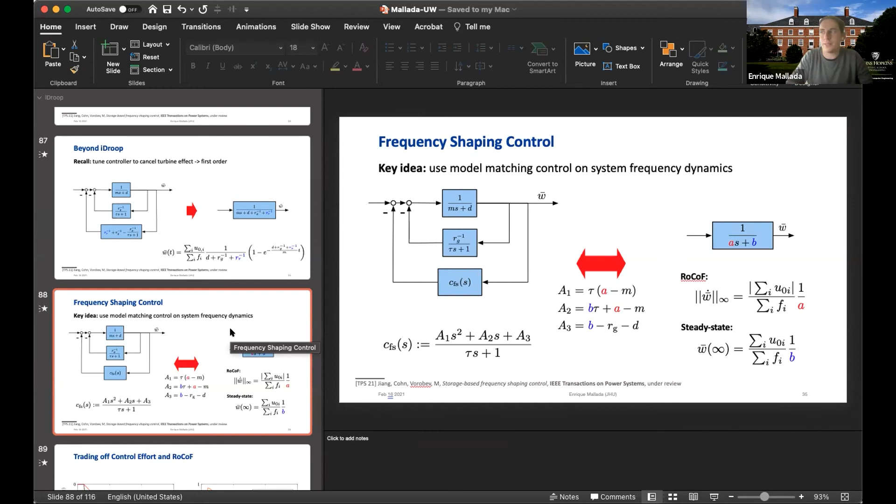Okay, yes. So in the analysis that we are showing here, I do not assume that there is saturation of the power. That is true. The workaround is that instead of doing that, what we aim at computing is the peak power that your controller will have in per units on the particular units of your system.

We do it in per unit. And we actually use this information to identify how much actual storage you need, or how much actual control effort is needed from the inverters. If this makes sense, let me be a little bit more precise. So if when you do these studies, you see that you're able to provide the performance you want with 0.6 per unit, then that means I need to be able to provide such an amount of power coming from the inverters in per units.

But we have not looked at the analysis of what happens when you saturate. What truly will happen when you saturate is that any saturation on power here will actually be affected in terms of having an additional overshoot that was not predicted. So I would say as long as the steady state is actually well controlled, then this will not be a major issue for this particular problem. I hope this answered your question.

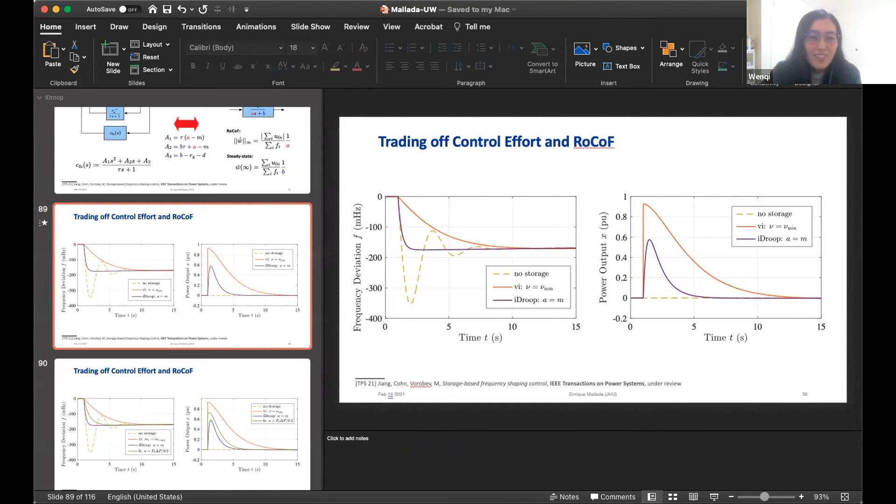So yes, absolutely. What you are seeing from these controllers is that the type of storage that you need is a storage that's able to produce high power, and it doesn't need to provide it for a very long amount of time. So if you were to implement this with storage, then I would say that you should have that storage being used for something else, and activated only when needed to provide this support. Having storage just to do this, well, it's gonna work, but it's not efficient.

It shouldn't be the only purpose of that. You could also try to release some of the energy. People have tried to look at whether some of the energy could come from the inertia of wind turbines that you have. That is also possible to a certain extent.

Wind turbines will be a different way to implement this type of control, in which you need a quick release of power, but then you can settle down to zero in terms of the amount of extra power that needs to be released.

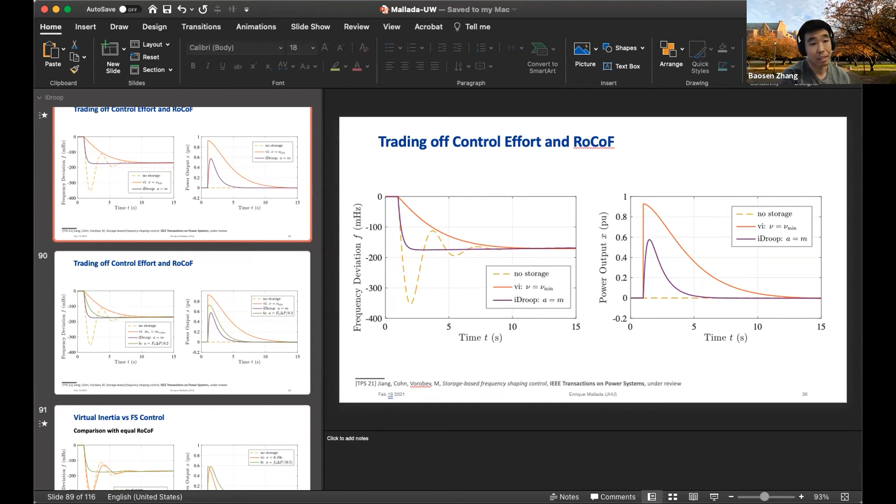Max asked, can iDroop be self-tuning as the system characteristics change over time? So basically, can it be self-tuned while the system changes? I think it can.

There's a lot of work that has tried to look at how to determine system parameters from measurement noise or frequency fluctuation. People try to guess whether the turbine time constant, or the aggregate, some notion of time constant, comes from the system out of measurements that you see from PMUs or other things. You could use that to actually tune the things to produce a better response.

The other advantage, which I haven't talked about much, is that all this depends on the system frequency, and the system frequency is sort of like the response of an aggregate of generators. As such, it does not depend much on the composition of the generators, but rather some aggregate measure of that. Because of that, it's fairly easy to get a model that works okay, provided you have an idea of the time constants in your network. I'm happy to give more details, but yeah.